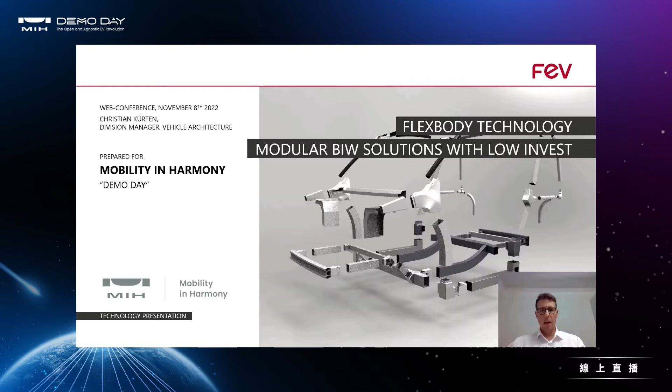Today, I would like to present you the FlexBody technology, which is a modular body-in-white solution with low invest costs. First of all, I would like to give you a brief overview about FEV in general. So we're a global engineering service provider located in more than 40 subsidiaries on 5 continents with currently 7,000 employees.

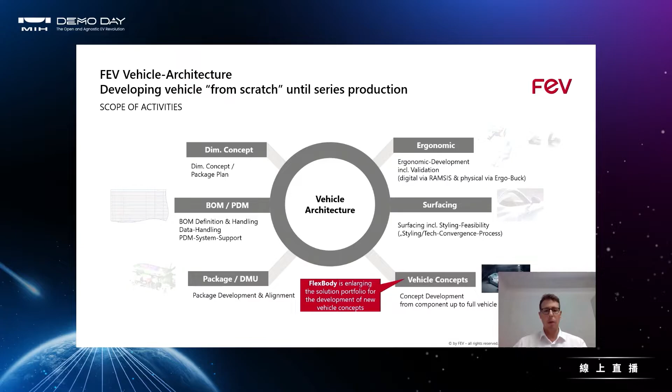Within vehicle development, vehicle architecture is one of our main fields of activity. FlexBody at the end is enlarging our solution portfolio for the development of vehicle concepts, and one additional concept and tool we can use when we talk about the development of new body-in-white structures.

To give you a brief overview about the idea and approach of FlexBody, in general, it's a modular and scalable body-in-white design kit, let's say. It's based on profile structures and nodes. It's developed really dedicated for lower quantities, which means our main focus regarding the manufacturing technologies and materials we use is selecting the ones with very low investment costs.

Regarding the material mix, we are able to mix different materials within the body-in-white structure, really according to the structural needs of project boundaries we have. And for sure, we are also using innovative and new joining technologies to enable this kind of material mix.

Regarding the production process, we are considering a single-shot fixture approach, which means we eliminate several sub-assemblies. And our focus is to assemble and join the whole body-in-white in one big fixture. And depending on the material mix and the tolerances we need to compensate, we are using, for example, injection bonding to handle these boundary conditions.

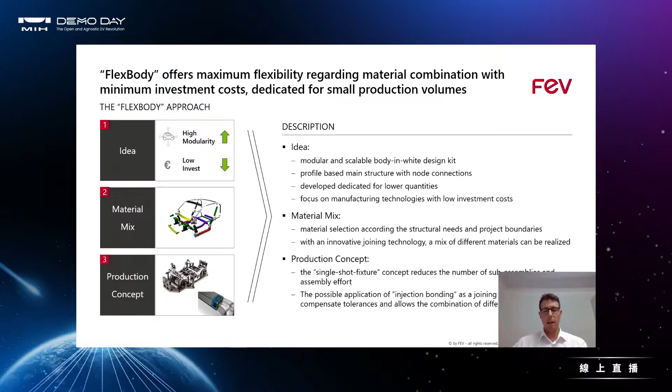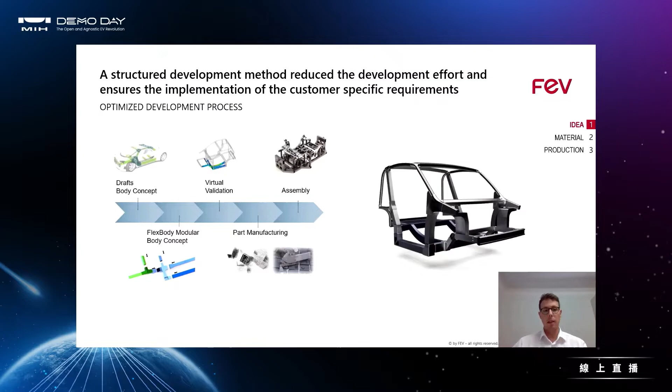From the structure concept point of view, we are quite comparable to a space frame solution, I would say. So if we consider the possibility for a ramp up or increasing quantities, that gives us the opportunity.

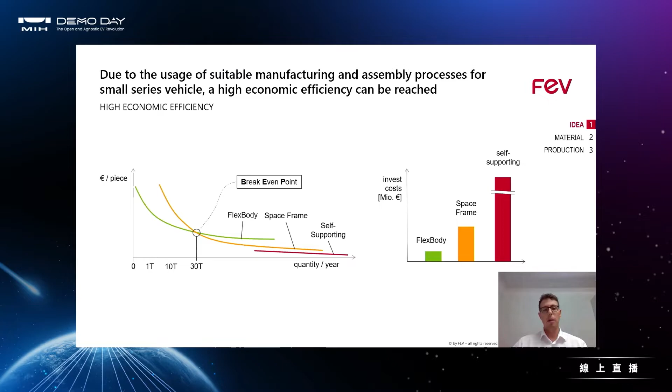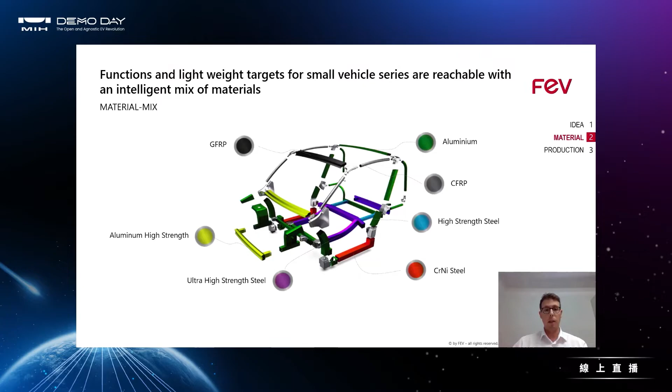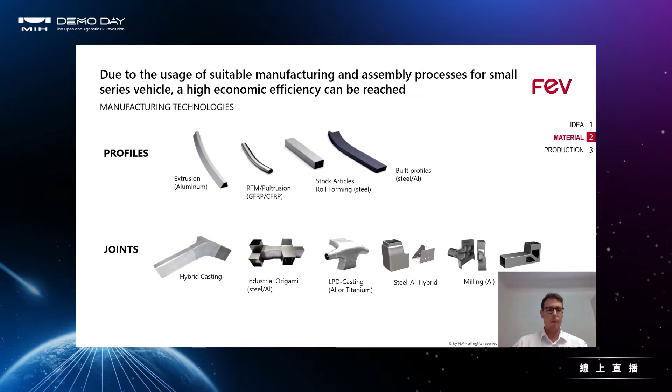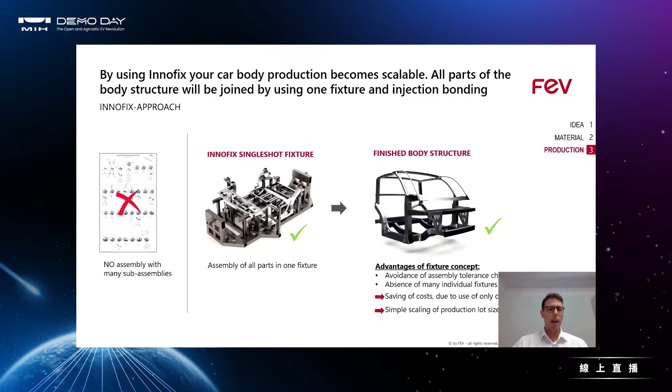The fixture concept I mentioned already. So the idea is to eliminate as many sub-assemblies as possible and go on with bigger assemblies to be faster in the assembly process and simplify the number of subassembly steps.

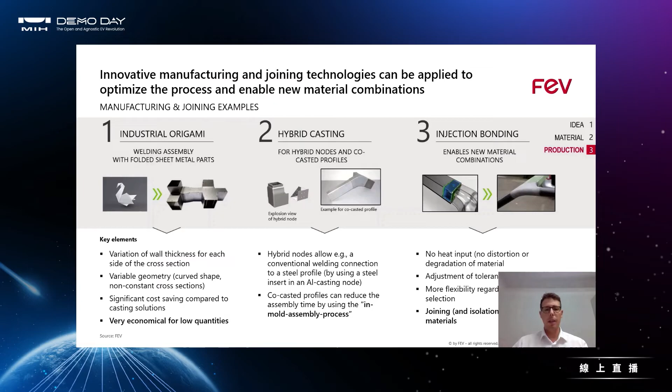And injection bonding, which allows us to combine really different materials, to compensate tolerances and isolate different materials regarding corrosion protection. To summarize it very quickly, FlexBody is a profile and node-based design kit.

It's developed with a focus on very low quantities. It's highly modular and scalable. The low quantities are already considered in the selection process of the material and manufacturing processes. And with new and innovative joining technologies, we are able to mix different kinds of materials. To summarize it in one sentence, especially in the currently very dynamic world of vehicle engineering, FlexBody can be one solution for the efficient development of a modular body-in-white concept.